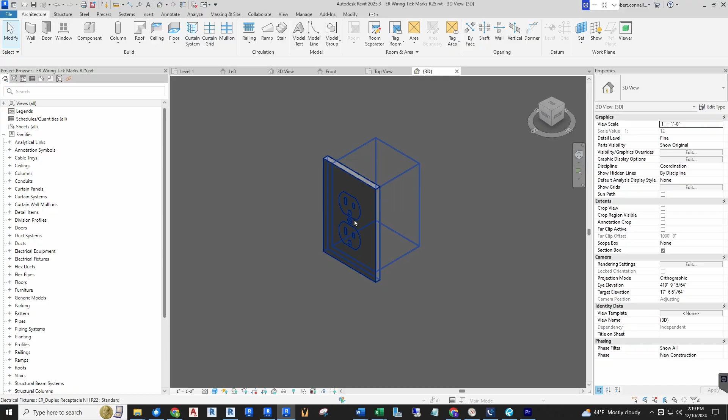So what if I told you that in Revit, you could have an electrical box with a cover that at the click of a button can be recessed or surface mount? Well, that's what we're going to cover in this video, so stick around. Let's get right into it.

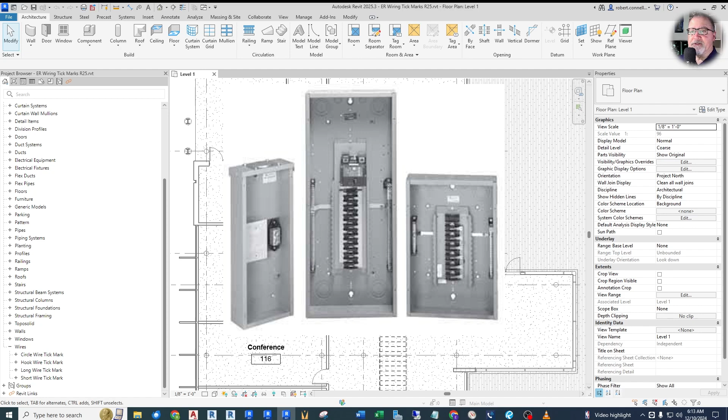So if you've done much electrical design or even installation, you know that electrical is full of boxes. We have device boxes, back boxes, pull boxes, junction boxes, panels are boxes, switchboards, everything's a box, really. So in Revit, it is handy to have just a box family that can be converted into these other kinds of devices and boxes. And one nice thing to have also is a family that can be recess mounted, like out of the box type of devices, but at a click of a button would be nice to have it surface mounted.

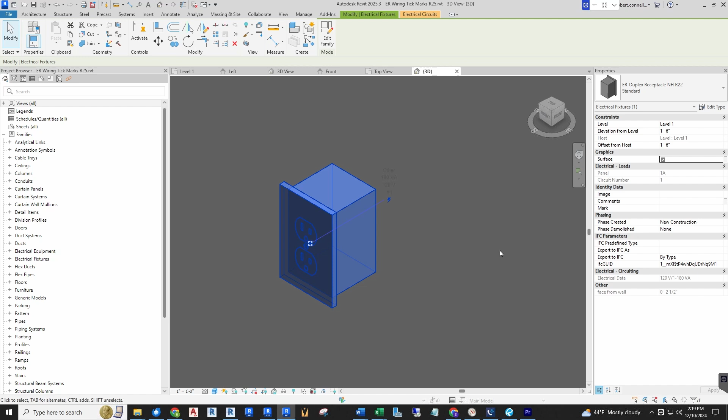I'm working with a client that does a lot of light industrial manufacturing kind of work, and they use a lot of surface boxes. Now, in a plan view, it's not quite as important how it looks. It'll just look like a symbol, like these receptacles down here. It's just the same symbol, whether it's recessed or not. But in 3 dimensions, if you're trying to do some coordination or even present some kind of a 3D view on your drawings, it's nice to have that box actually be surface mounted on the wall.

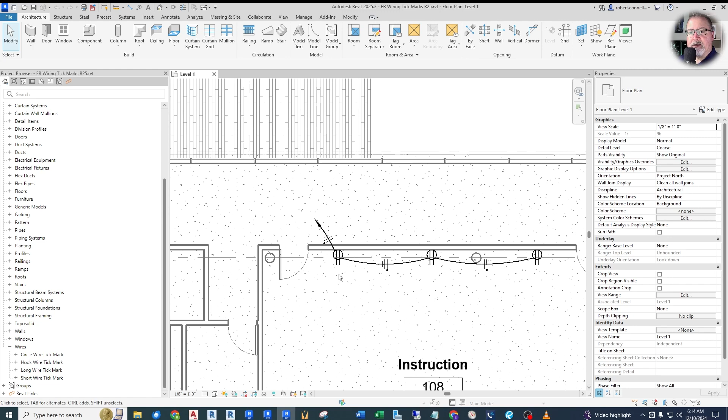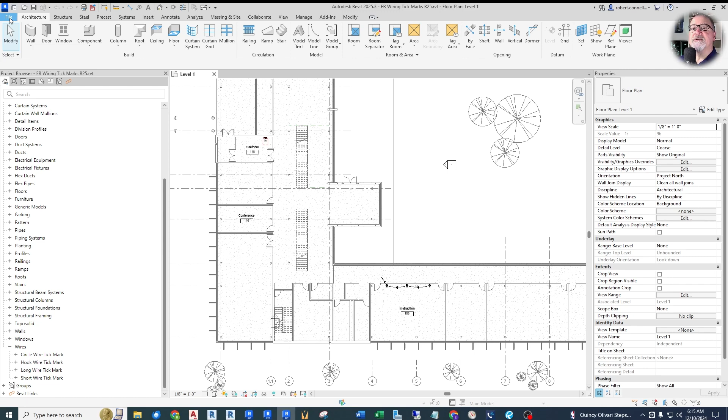So that's what we're going to do today. We're going to show you how to build this universal box as a custom family. It's a fairly good starter project. It has some complexity because of the toggle between surface and recessed, but as we get into it, I think you'll understand how it works. So what we want to do is actually start a new family. So go to File, go to New, and go to Family.

And when you go to create a family, you have to start with a family template. Revit comes with many different kinds of family templates, as you can see here. Things as specific as electrical equipment, ceiling or wall based. There's a lot of hosted. That's what wall based is, a hosted family that has to connect to a wall or a ceiling. Fire alarm, we have mechanical, all these different things.

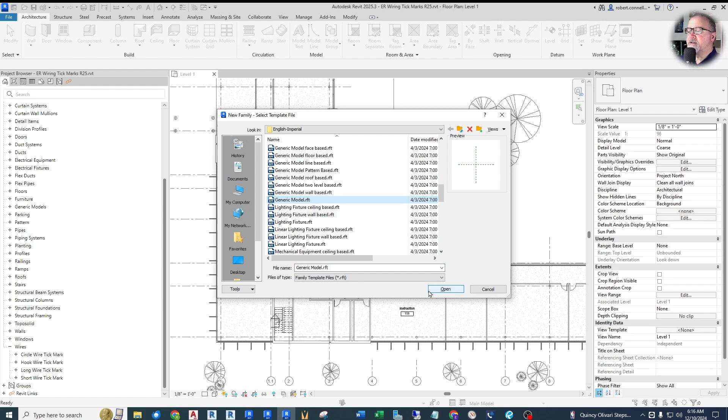Well, what I want to start off with is a generic non-hosted family that I can put anywhere in my plan. So I'm going to start with generic model. I don't want wall based or any kind of based. Based means hosted. We want generic model. So let's just open this up. And it puts us into the family editor.

You have your views on the left, kind of like a project. And then you also have a properties box, which I put on the right. It can be anywhere. And you have your ribbon that you can create different shapes and create lines. You can add connectors to these families because, as we know, MEP is all about the connectors. And then things like reference lines and planes and things like that. So what we're going to do is get started on this box.

It's going to be a generic box, so it doesn't have a category. Now, remember, in Revit, the families are classified by their category. You have electrical fixtures, you have electrical equipment, you have lighting fixtures. And so there's different categories. You have data devices, fire alarm devices. We're going to create this as a generic box, so it does not have a category yet.

This is going to be the basis that we use for other boxes. Once you have this box created, you can use it to build panels, pull boxes, all these different boxes we talked about. You can use this model to create that. So this is just a generic box with a cover. This view we're at right now is called the reference level. It is a top view.

As if you think of like a plan view, we're looking down at the top of our device, and our device is going to sit right here where these lines cross. You can click on this, hit F2 to rename it, and I'm going to say top view. And then this 3D view, I actually want to call this 3D view.

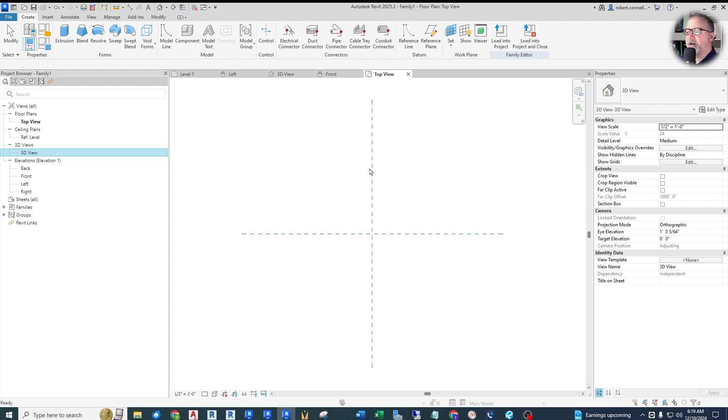So since this is a top view, this here will be the vertical center line of our box. I'll do it with lines here just to show you. We're going to have the back of our box like this, and then the faceplate will be out here.

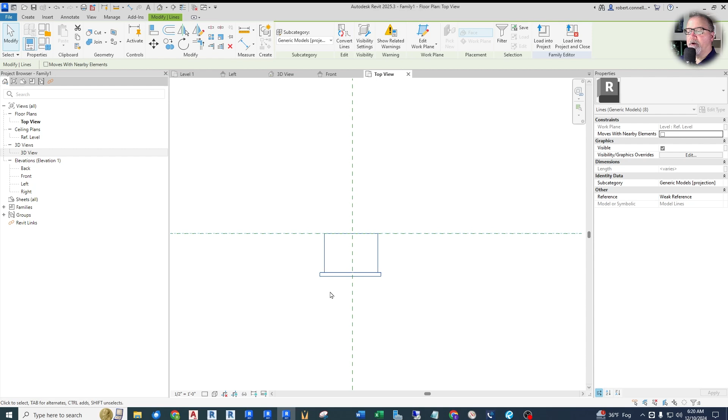And this will be the wall surface for a recessed box. Now, for a surface box, I want all of this stuff to move out to here so that this wall line is at the back of my box. So we're going to put some parameters and some dimensions and mechanics into this thing to let this pop back and forward. So that's an example of what we're going to do.

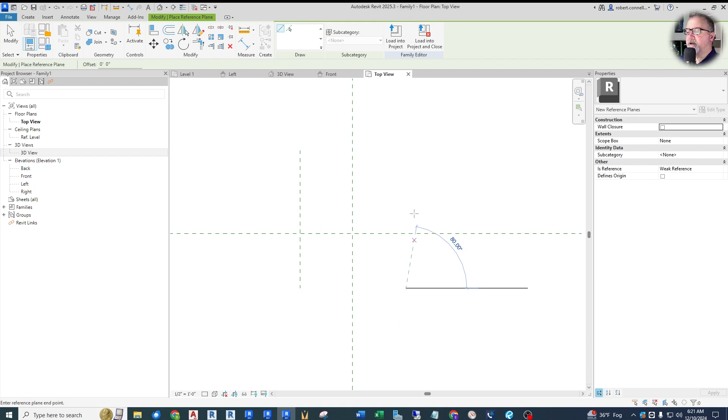Now, to do this, we want to draw some construction lines. We're going to be using a reference plane. So a plane is like a sheet of paper. It actually goes on to infinity. So we're going to draw a flat plane, and we're going to make the boundaries of this back box that I drew in. So we need a left side and a right side, and we want those to be parallel. And then we want the back of the box. And I can just say create similar and draw the back of a box.

These are just kind of my sketch lines. We want a face of the box. Typically when these families are created, the face of the box is this line right there that is the wall. It's always at the face. But we don't want it always at the wall. We want the face of our box to be adjustable. So we need another separate line that is the face of our box and where our cover plate will go. So again, let's create a face of the box. Now I'm going to draw it a little bit forward of this line.

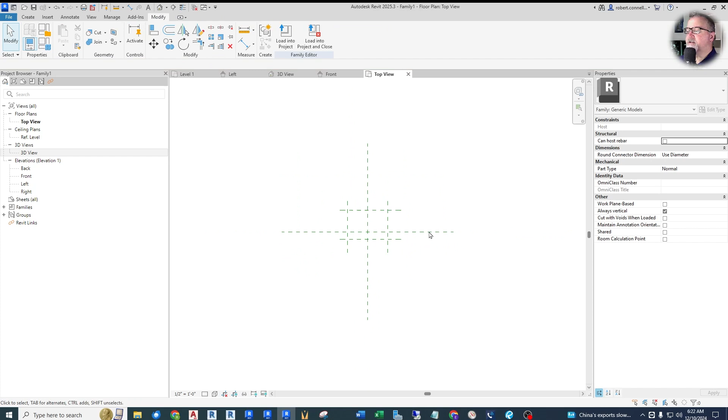Now this line here, I can't select it because it's pinned. Let me undo that. This is called the center, front and back. Again, back of the box up here, front's down here. This is the center. We're going to treat that as the wall. So here's the front of our box. So we're going to get this drawn in and as an extrusion.

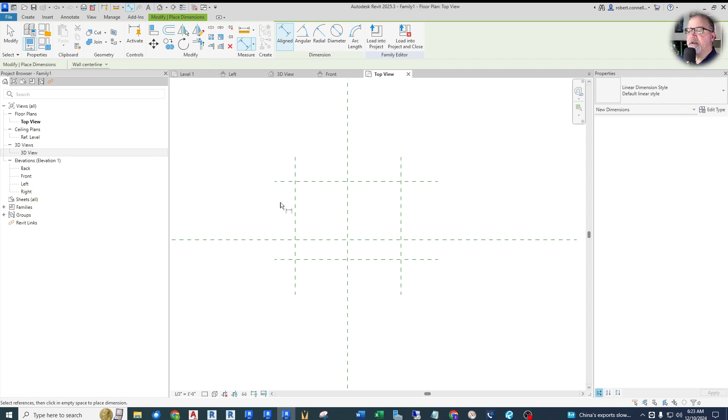Now I want to put some measurements on this. So I'm going to use this standard. This is a dimension. It's an aligned dimension. As you can see here, we can do angles and radial diameters, things like that. Aligned dimension. And I'm going to go from what I'm considering the front of the box to the back of the box. Now, just as a side note, you can actually click on these and name or label these lines. So let's go ahead and just name this one, just as an example. We'll call this front of box.

There. Now, this dimension right now is set. I can change it by moving these around. You can see that dimension changes. Or I can give this dimension a label so that I can create a parameter for this. I want to create this box so that I can change its dimensions to make any kind of box I want. So up here under label dimension, I'm going to label this dimension. And right now there's none to choose from. So I'm going to create a parameter for this label. And let's call this parameter box depth.

Now type or instance. This is where you get into a big decision on parameters, whether they want to be built into the type of that family when you bring it into a model, or do I want to be able to change each instance, each location of that box? I want to be able to make it variable. For the purposes of this universal type of box, I'm going to set these up as instance. Now I can change this later as I create actual device boxes or pull boxes or things like that.

I already know that it's a length type of data. Now I can group it under a name. So leaving it as dimension makes sense. So that's good there. So, okay. There it is, box depth. Now I can change this box depth. I can change it here, or I can go up to the blue little symbol, family types. Now this is where you see the list of all your parameters. And under dimensions, which we chose, here's that box depth.

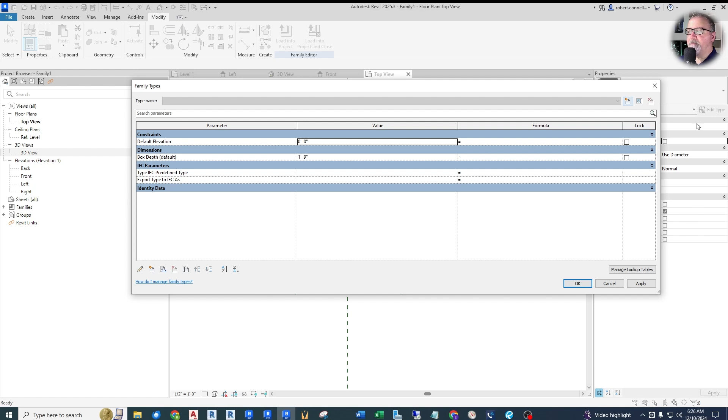Now we also want a box width, so we'll do the same thing. We'll put a dimension either here or go up to here to the quick access dimension from here to here. We're going to click on that, give it a new parameter name, box width, leave it as instance under dimensions.

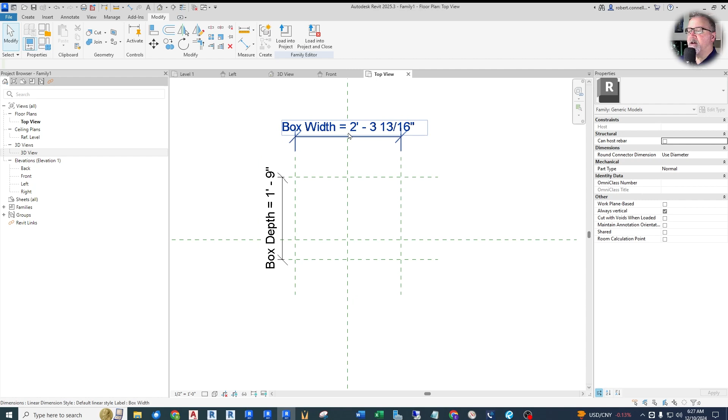We're good, simple. Now, one thing about this is I want this box to be kind of centered on this line. So right now I can move these dimensions around and it's not centered.

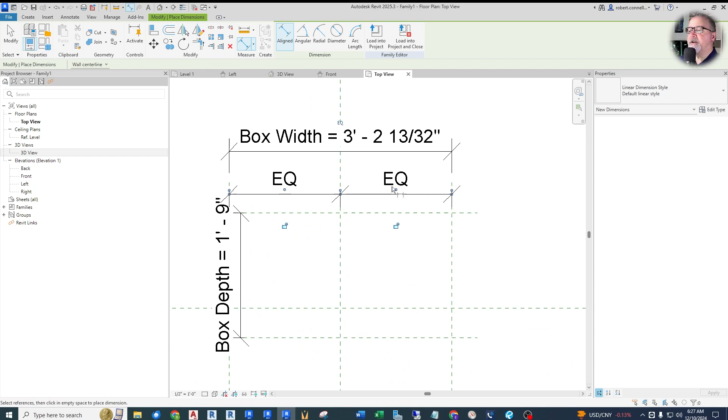So the way to make this centered is to use another dimension up here. This time we're going to dimension from the edge to the center line to the other edge. Click anywhere. Now, up here you can see this little EQ with a slash. We click on that and it makes these dimensions I just created equal, which in effect centers this box.

So now if I move these dimensions, both of them move and it keeps it centered. Now we can actually draw an extrusion of this box, so we want it to turn into a 3D box. Well, how do we do that?

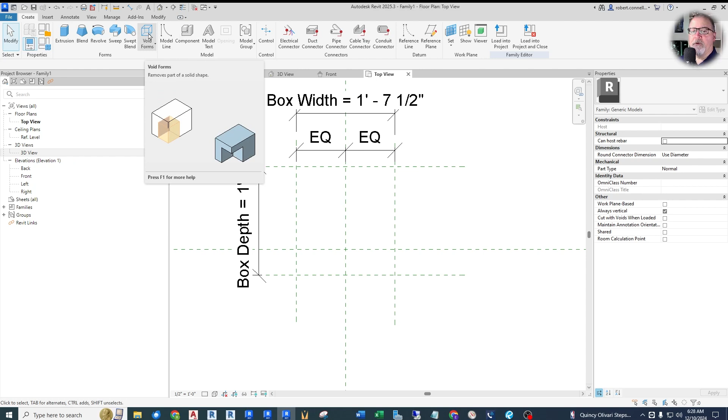Let's go over to create. And here's where we have our forms: extrusions, blends, revolves, different types, different shapes. There's even a thing called void forms where you can actually cut out a piece of your box. So let's just go to extrusions, and it puts us in kind of a sketch mode. Things kind of dim out and we get the check and the X up here.

Here I'm in Revit 2025 and they put the depth up here. It used to be down here, but you can make the depth of the extrusion because I'm working in 2 dimensions, working on the width and the height maybe of a rectangle. There's also a depth, a Z component into or out of the screen, so I can set that. Well, I'm not worried about that depth right now because I'm going to force that depth to be a certain depth with another reference plane, as you'll see when we get to the front view.

So we have our tools, drawing tools. We can use lines or rectangles, circles. You can even use pick lines, where you pick lines to be the edge and then have to trim them. I'm going to use the rectangle because I'm just drawing a simple rectangle.

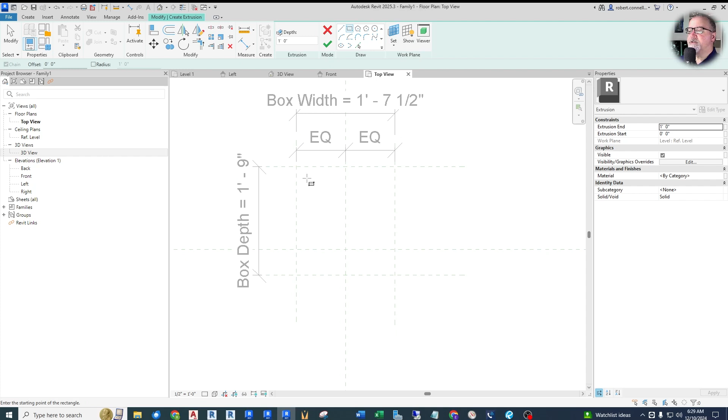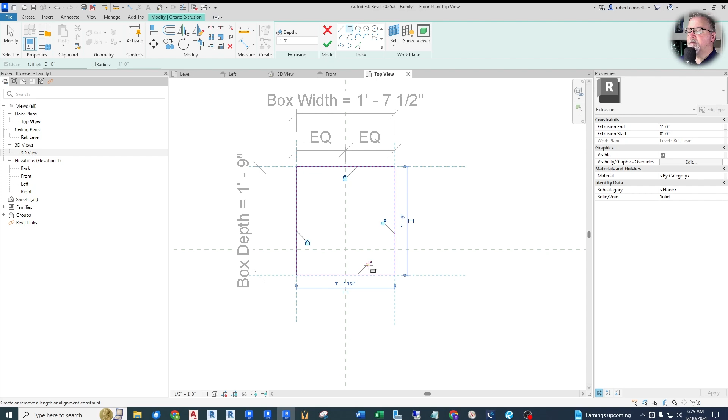This is a box. Now I want to go clear down to the face of my box. Now I can make these hit exactly, snap to these reference planes. And when I do that, it gives me the option now of locking my sketch to that skeleton of reference planes, so I will go ahead and lock that. That's very important. And then I'm done.

Locking it allows this extrusion to move with these planes. These planes are what guides this extrusion. We don't dimension the extrusion itself, we dimension its reference planes.

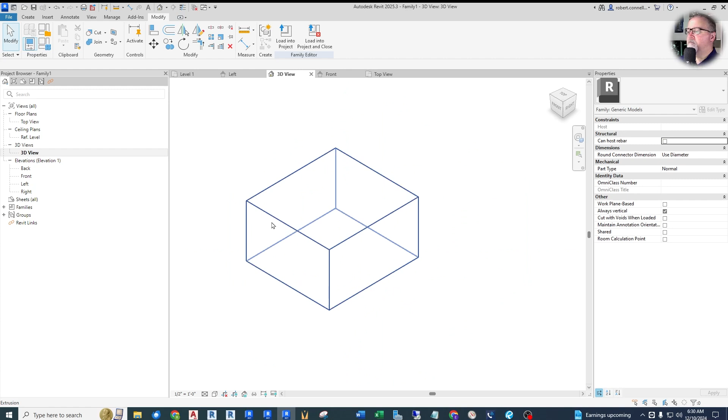So let's take a look at this in 3D. What do we have? There we go. We made a box, I hope you're proud. So there's our box, and we can make it look a little different. We can get it shaded so it's nice and gray with a shadow, but that's essentially what we made is a box.

Now let's look at the front view. It's already here. The front view, we will see a datum point called a reference level. In this case, this reference level would be the elevation above the floor. What do we want that height to be? Do we want that height to be to the bottom of the box, top of the box, center of the box? Well, this has implications to what kind of box it ends up being.

Let's say, for example, it ends up being a panel board. A lot of panel boards, I like to have the dimension, vertical dimension, to the top of the panel. For a receptacle or a data outlet, I like it to be to the center.

Let's say you have a box behind a wall-mounted light fixture, a sconce or something, and maybe you want that to be at the bottom of the fixture. This has implications depending on what kind of box you make, so in reality you may need to create 2 or 3 different universal boxes for whatever you're making. For this one, we're going to call it a box for a device.

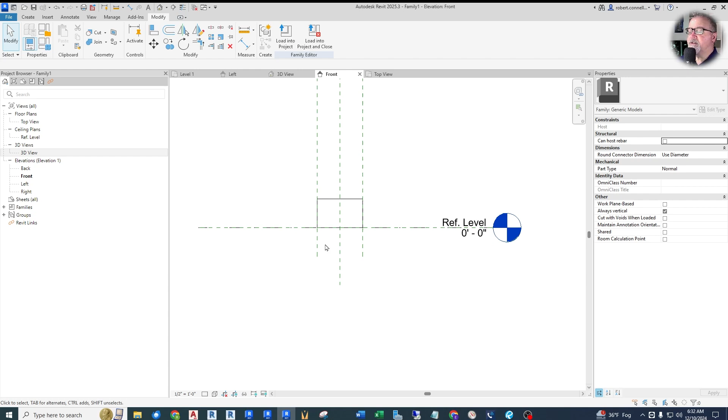We'll go to the center. So we need a bottom of box and a top of box reference plane. Go back to create, reference plane, and we're going to do a bottom of box and a top of box.

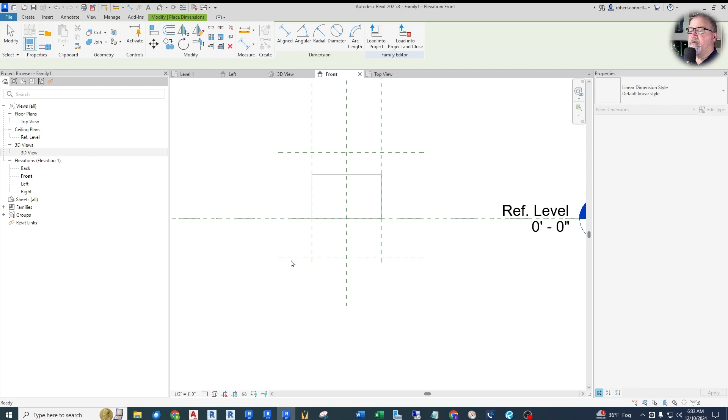Again, we're looking at the front, the face of our box, and we need some dimension. We're going to go from the bottom to the top, click anywhere, and we're going to call this box height. The rest of these are good, like before. Now that shows up in dimensions here, and we can see there's no default on height or width.

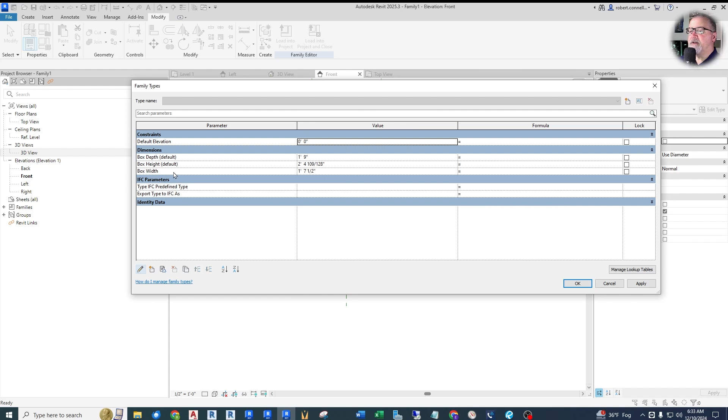So I failed to change these two instances, but that's easily remedied. If you do it wrong, you can just edit it. Click on box height, go down to the pencil here to edit, and simply change it to instance. There it is. Same with width. So even though you create these once and do it wrong, you can change that.

Now we also want this box to be centered on this reference level. We don't want the actual level itself - there's actually, if you tab, you can see there's a reference plane behind it. That's what we want to dimension to. This reference level is kind of in my way.

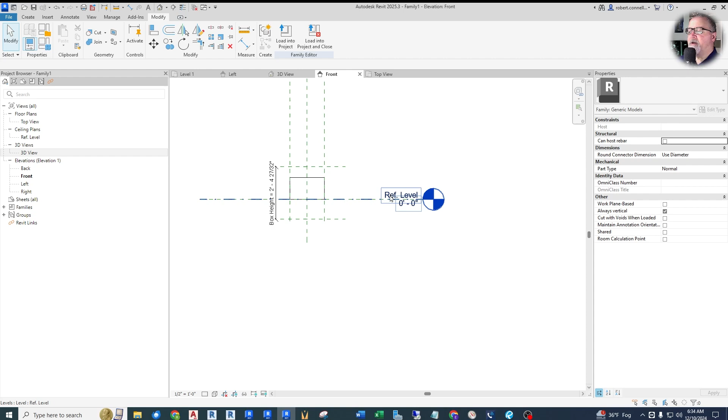So what I can do is move it, simply move it out of the way. There - now it's still there, it goes on to infinity logically. But now I can get to this reference plane, which is what I really want to be dimensioning to.

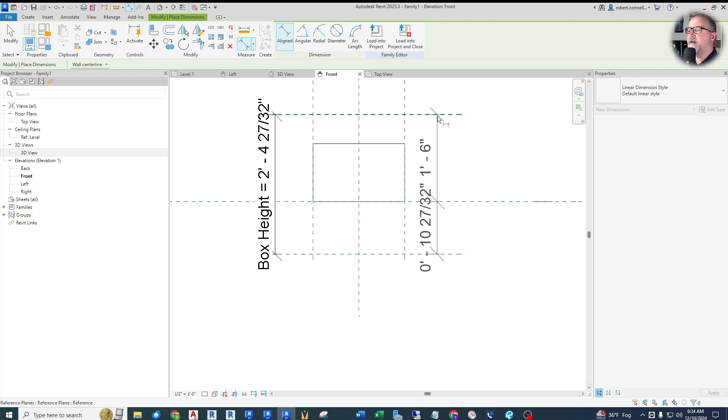I want to equalize this, I want to center it. So let's go back to our dimensions, and we take our 3 - I can do it over this side, get the 3 of them, hit the equal. There it is.

We get this error: constraints are not satisfied. You'll run into these as you're doing family editing because there's a lot of particulars with how constraints work. They mean things like locked items, things attached to dimensions. So what constraints - we have this, it kind of yellows out or oranges out this center one. What's happening is this center line is actually pinned or locked, and so it's trying to move it to make it equal.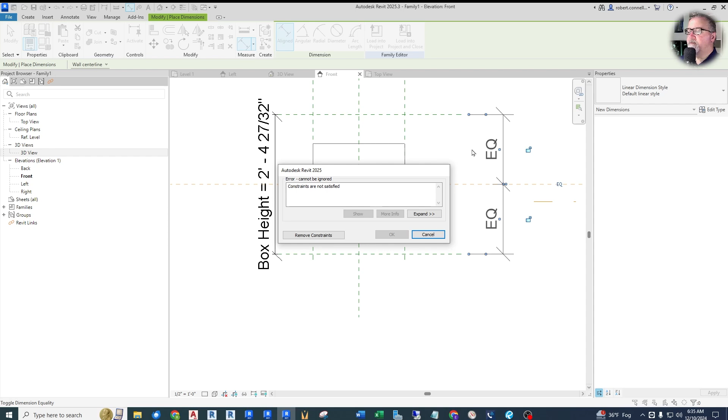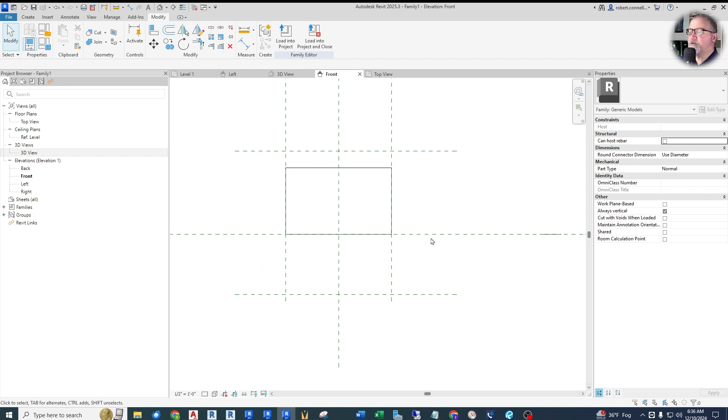So let's cancel that. What I need to do in this case is equalize this before I give it a box height. So let's get rid of this. I'm going to make sure these are equal first before I apply my equals to it, so it doesn't try to move this pin. Now I don't want to unpin it because I still want this center line to be at this reference level, but I do need to make sure these are equal before I apply my dimensions.

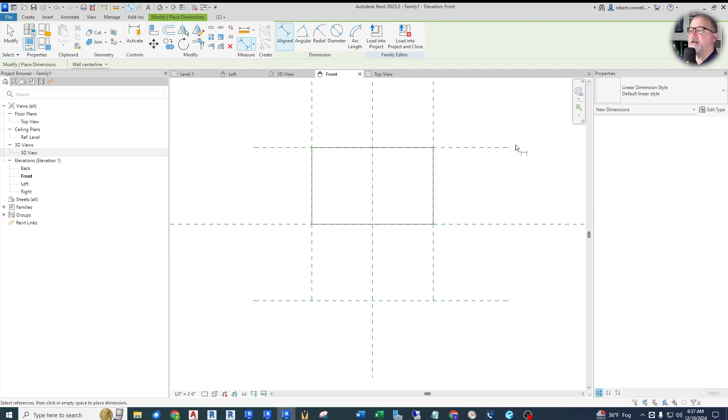What you can do is click on that, and then get to this dimension itself and just type in 1 for 1 foot. I can get to this one and type in 1 for 1 foot. Now these are equal, so when I do it, it shouldn't give me an error because they are equal - there. So now I can apply my dimensions for the height.

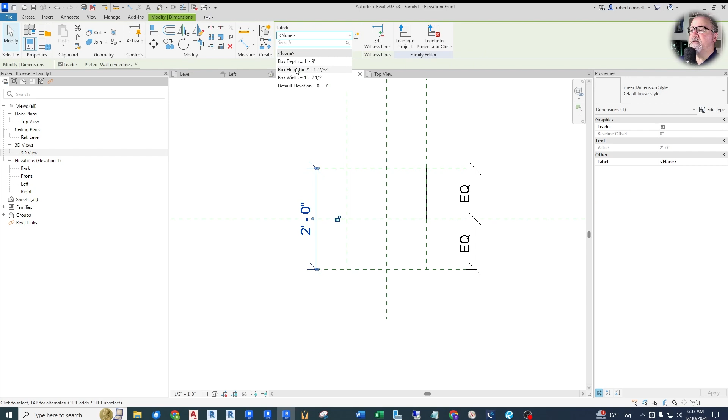Now you may think, oh, I have to recreate this parameter - well, I don't, because it's already made. Instead of creating a new one, I can just go to the drop down and find it, box height, right there. So now I want to tie this extrusion to these dimensions so that my box height is controlled by them.

The way I can do that - I don't have to go back into sketch mode. I can do it directly from the extrusion. So click on the extrusion. I want to align the top of this extrusion to this reference plane, so what I use is the Align tool.

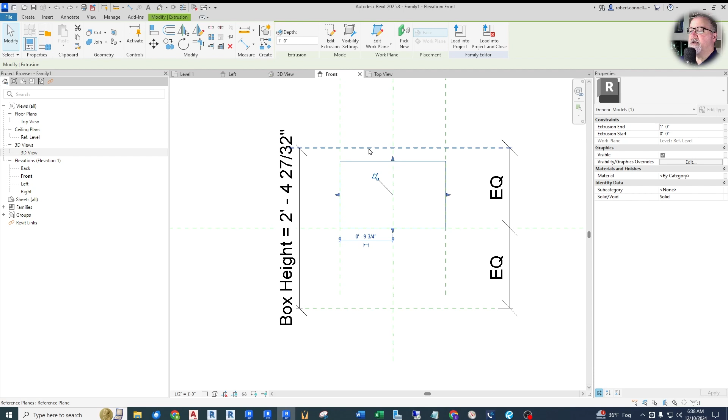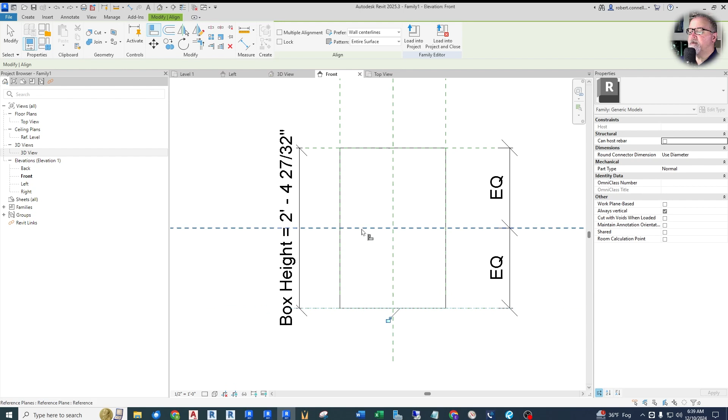Up here under Modify is called Align, AL is the shortcut. I want to align it, go to there, from there, and lock it. I still have the Align tool. I want to go to here, from, and make sure I'm touching the extrusion. It'll tell you extrusion, and lock it. Now my extrusion is attached to these reference planes, and as I change the dimension, it changes, as you can see.

It's good to test your family frequently. Pretty much after every dimension, I like to test it. It's called flexing your family. You flex it, bend it, to make sure that it's working. Otherwise, you'll end up toward the end and it's broken, and you won't know which step broke it because you're too far into it.

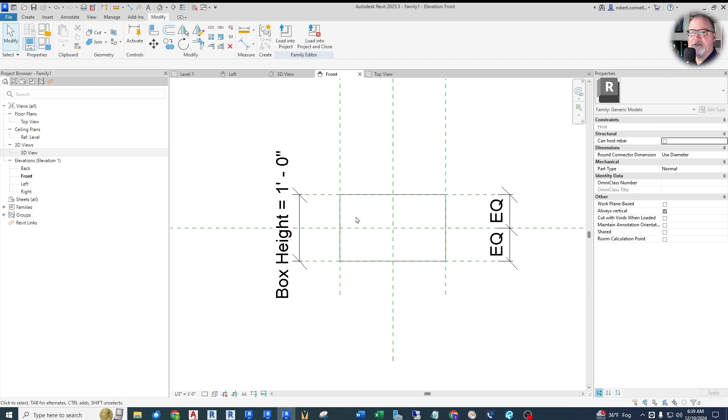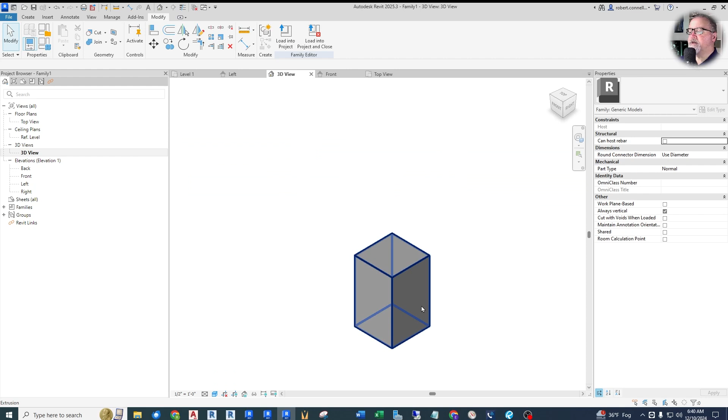Let's go back to our top view. So here's our box, and it got moved away from here because it floats. This box is not tied to this wall line yet. So let's go ahead and get this thing down closer to where we want it.

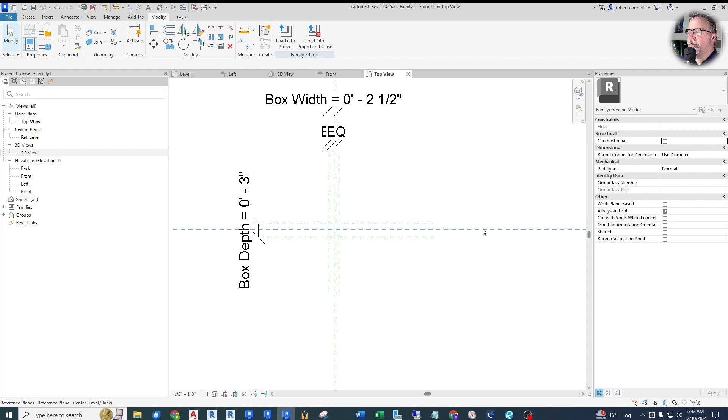Now what I'd like to do is get this box tied to this line that's going to become the wall line. The way I'm going to do that is control the dimension between the face of the box and the wall. When it's recessed, I want this dimension between the two to be 0. And when it's surface mount, I want the dimension between the wall and this line to be the box depth. See how that works?

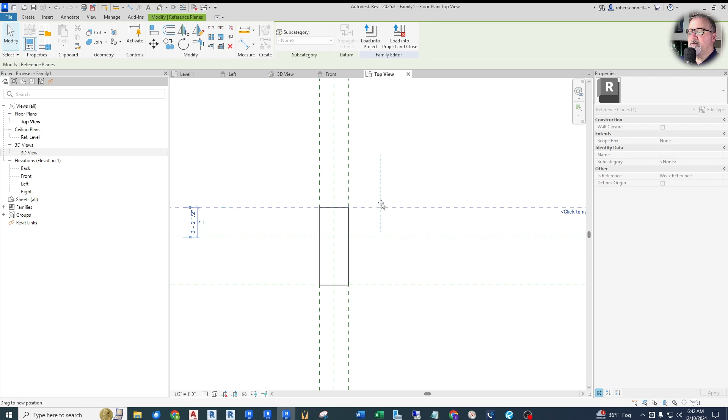So I just need to create some parameters in here that do that. Let's get a dimension between the face of the box and the wall, from here to here. And I'm going to name it just that - let's name it face to wall.

I'm doing this lowercase because I don't want this parameter to really be adjustable by the user. This is kind of in the background, it's like a working parameter. So I'm making it kind of nondescript, making it blend in. The way I can make it blend in is get it out of the dimension heading. I'm going to put it down in a place called Other. I'll show you where that ends up.

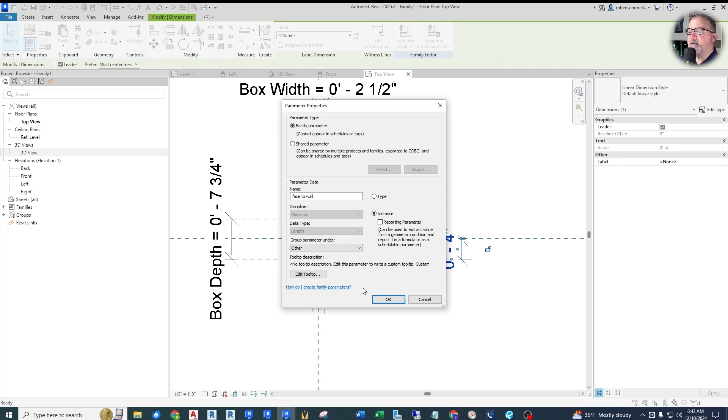So Other, again we need instance. Look at the parameters now - you look at dimensions, you don't see it. It's way down here under Other. And when this family is in a project, in a model, there'll be other parameters in the way. This is going to be way down at the bottom - people are not even going to see this. We're also going to put a formula in here so that people cannot change this. I'll show you how that works.

So that's the first step. We have this dimension - how can we make this dimension variable? Well, we're going to give the user a button to push to change it from recessed to surface. I want the default to be recessed, like you see out of the box when you get a receptacle. And I want to give them a button. Now how can I make a button or a switch?

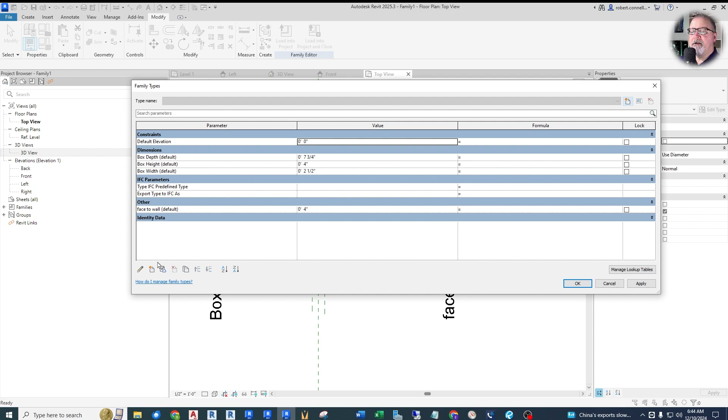Well, the way you do that is to create a parameter that's called a yes/no parameter. Now I don't need to tie it to a dimension - I just want to create a parameter from scratch. So in my family types, down here at the bottom, I can say new parameter, and create a parameter from here. New parameter, same box - I'm going to call this 'surface,' which means if you click the box named surface, it turns it into a surface mount box.

It's also instance. Now, discipline common is fine. The data type - this is where I can pick what I want. The dimensions were lengths, but you could have integers, angles, any kinds of data type. We want it to be a yes or no. And I do want this group somewhere where I can easily get to it - I don't want it down here in the bottom Other.

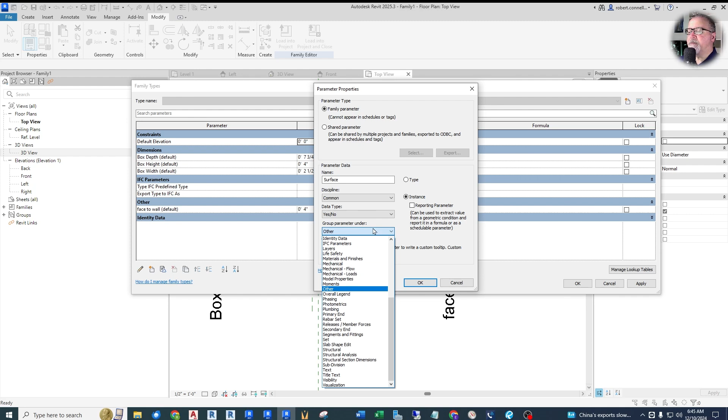Do I want it under dimensions? Possibly. Another place I like to put it is called graphics. That ends up kind of up top, here. So graphics ends up here, it's kind of easy to find for the user. It says surface, it's checked right now, but I can check it or uncheck it. I'm going to make the default unchecked, which means it would be recessed.

Now follow along with me. This is where it gets a little complex as a starter family. We are going to use a formula and some Boolean logic. So what we're doing is we want to create an if statement. If you've done any coding, you know how those work. An if statement to say: if the user selects surface, then I want this face-to-wall dimension to be the box depth. Remember we talked about that? We want to pull it out, box depth away from the wall. If it's not selected, we want that face-to-wall distance to be 0. Those are our two conditions.

So the way you do that in Revit: if, and then put in parentheses. What am I testing? I'm testing the variable called surface, so I just type it in. If surface, that just means if surface is selected - surface equals 1, if surface is asserted, whatever you want to call it, surface is selected. If surface, it implies if yes, comma, what do I want to happen? The first thing I want is face-to-wall to be box depth. So again I just type that in, box... you don't get to select or choose it, you just have to type it in exactly the way the parameter is set up, box depth. Another comma, if not - so if then, and if not, or else, we're going to say it's 0. Simple. So the face-to-wall distance, if surface is checked, it's going to be the box depth. If it's not checked, it's just going to be 0. Close parentheses, apply it. If I didn't make any typos or spelling errors, it should be fine.

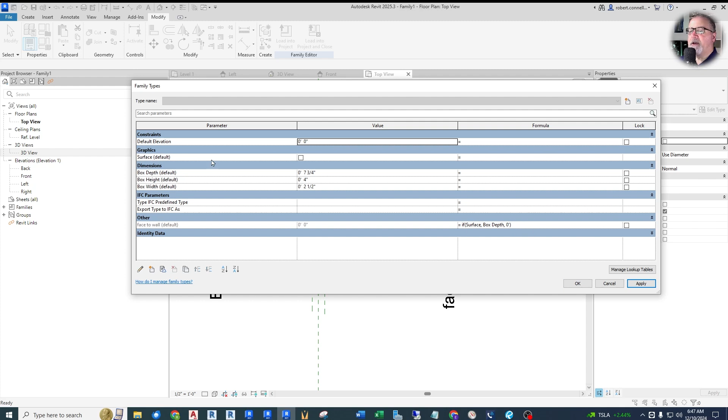Looks like we're good. Say okay, I have it unchecked - the face to wall is 0 because surface is unchecked. Now if I go to surface, I'm going to make this box a little smaller so we can see what's going on. Now if I click surface and say apply, bam, the box jumped out to the face of the wall. So simple - that checkbox moves it to surface and recessed.

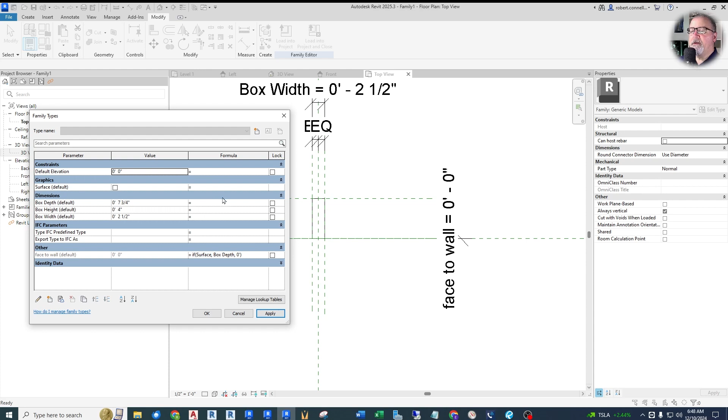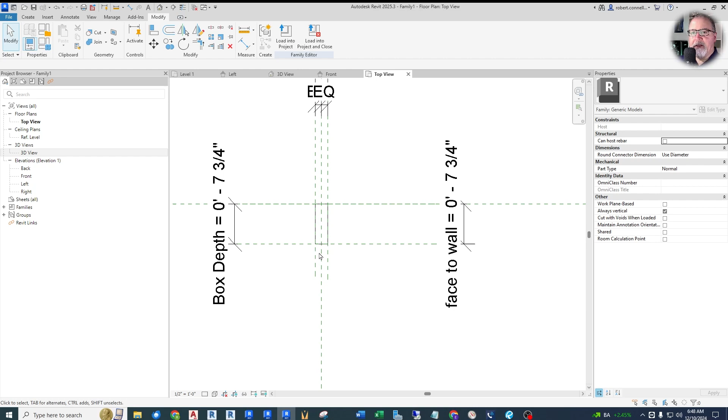Now I'm going to go ahead and keep it on surface to do the rest of the family. I would like to add a cover plate to this box. Most of the boxes you use will have some kind of cover plate. Now that varies too - in real life a recessed box cover plate extends beyond the box, while on a surface cover plate that may be the same size as the box. So we can get crazy and apply some more dimensions for this cover plate width, overlap, and all that. For the purposes of this family, I'm not going to do that. I'm just going to let it overhang for either case.

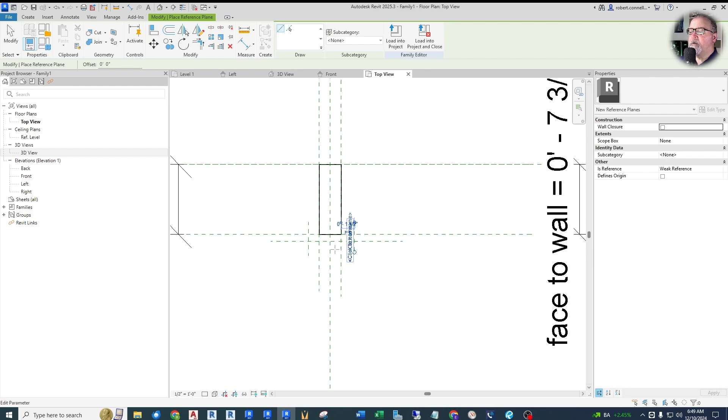So what we're going to do is create another extrusion. This is the cover plate. I need to create some more reference planes. So this will be the face of the cover plate, and then I also have sides to the cover plate where it extends over. I'm going to make the parameters be the extension so that if you want to get crazy and include some more adjustability features for this cover plate, we can. So let's do that - dimension from here to here, and we're going to call that...

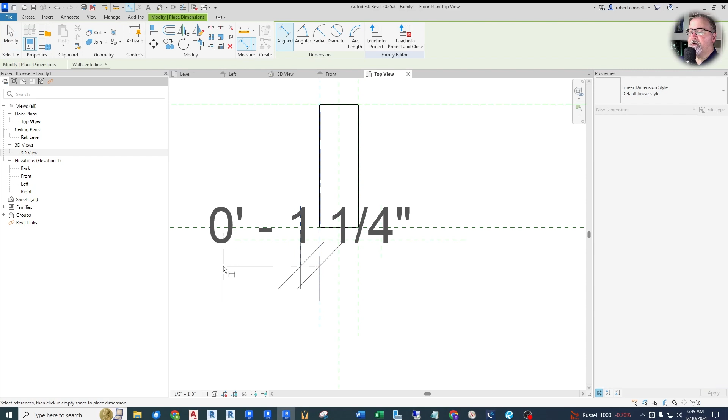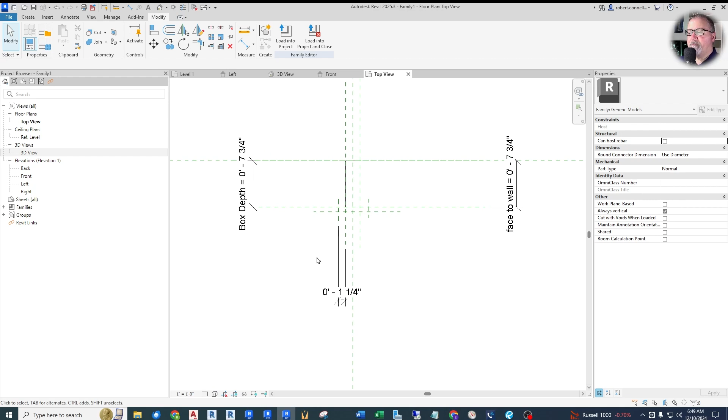Now if these dimensions get in the way, you can move them out of the way down here. You can also make them smaller just by changing the scale of the family. Now this doesn't change anything, no dimensions get changed, it's just a graphical representation - it just allows these dimensions to be smaller on the page. So we're going to make this dimension be something like cover overhang - that's how far the cover extends beyond the sides of the box. Again, we'll make these all instance parameters. It's a dimension.

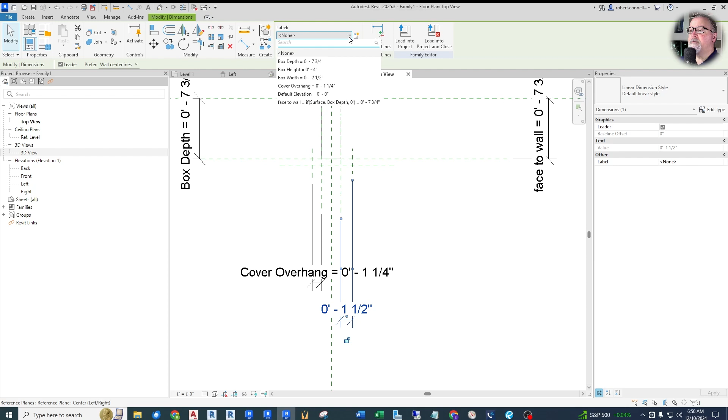So cover overhang. Now I want the other side to be the same thing. Now I can't do an equals because I've got a gap between them, but I can just set it to the same parameter. So this guy here, when I go to set this dimension to a parameter, I can choose a parameter I already have, which is cover overhang. And that way they're both the same. You can use these parameters over and over. I'm also going to use that for the top and bottom overhang when I do the face view.

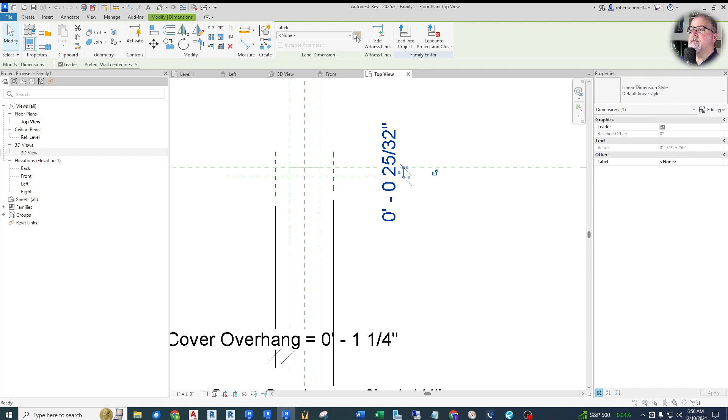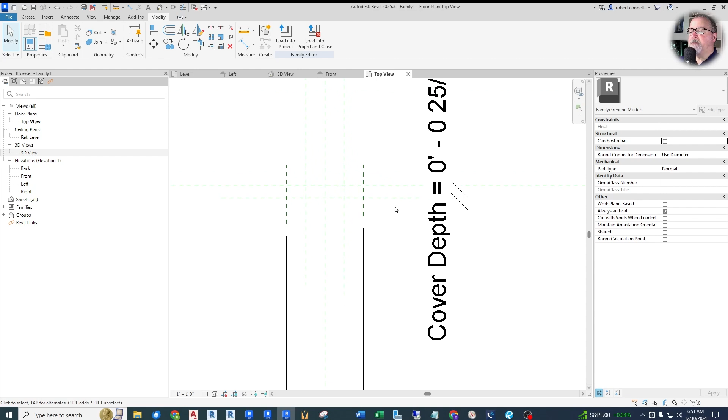One more thing I want to do in this top view is the depth of the cover. So here, from the face of the box to the face of the cover, and I'm going to call this cover depth, thickness, whatever you want to call it, or depth. So all these parameters are going to be available to the end user. So now we can create this extrusion, and then we'll go and do the front like we did the other. So we just need another extrusion, which is going to be this box here to be the cover plate. Create, extrusion,

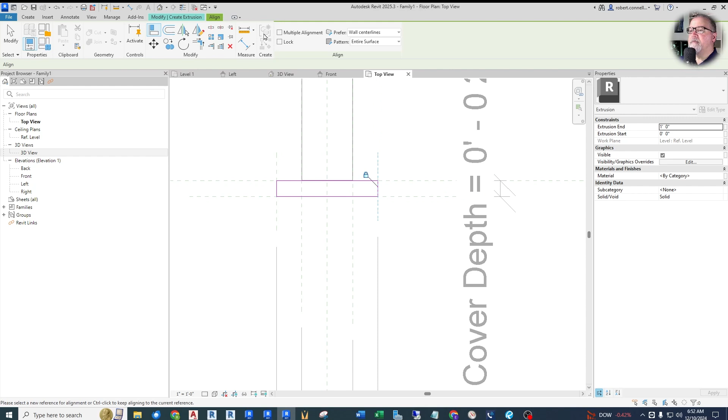rectangle. Now this time I'm going to draw it a little bit over and show you how you can align these. I'm still in sketch mode. It's purple or pink, and I still have these here. I can align this now. So align there, lock it, align to here, from here, lock it, to here, from here, lock it, and to here, from here, lock. We're all locked. Now it kicked me out of my sketch mode because I'm in the align mode. So I need to go back here. There we go. And finish that. Now my cover plate extrusion is aligned to its dimensions.

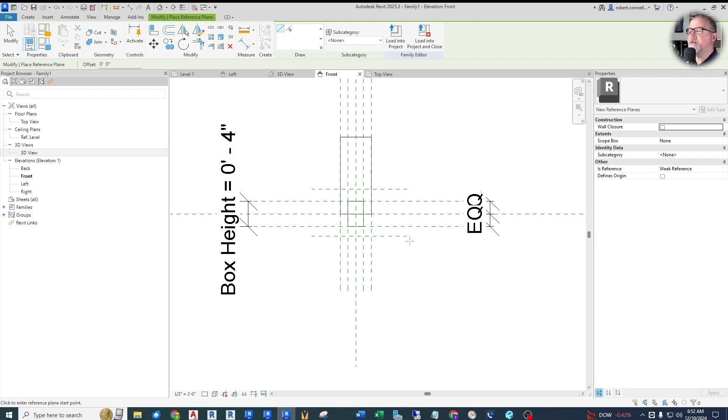Let's take a look at the front. Cover plate's huge because we don't have dimensions on the height yet. Let's go ahead and create similar, and let's get some height and some lower dimensions to this cover plate. I want the overhang to be the same. So here we go. Just putting these dimensions. Click on it, choose the overhang that I already have. Overlap, give it whatever descriptive word you like. Here to here. That's the bottom of the box. Overhang. There we go. Now I need to attach this extrusion to those dimensions.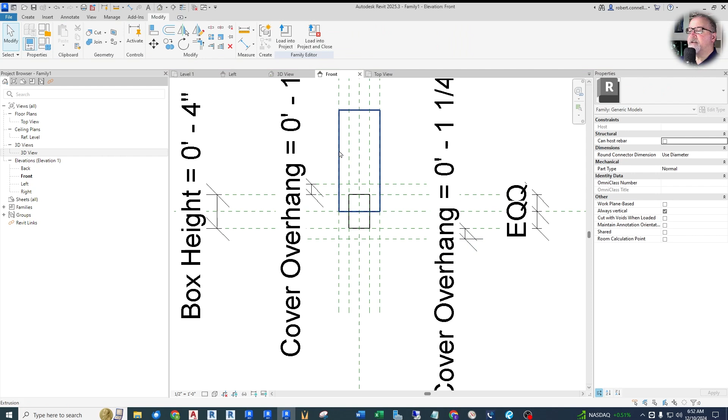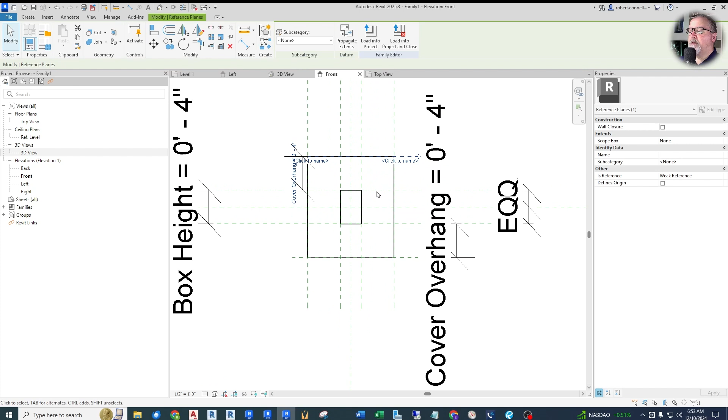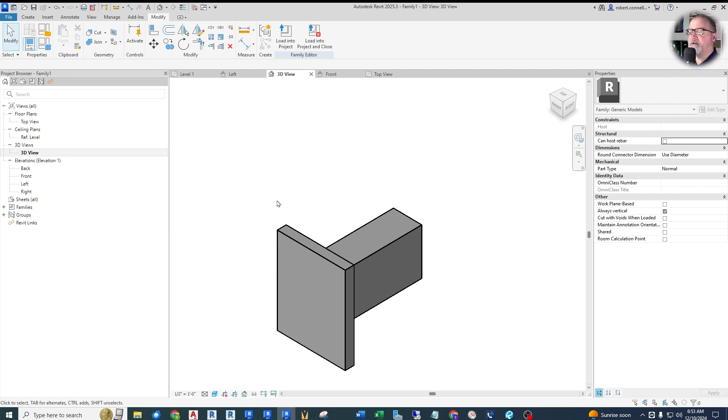So let's do this bottom guy first. Let's align to here from this one and lock it. And the top of my cover plate, I want to go to here, from here. Now, you can see my cover plate expands nicely in all directions. Things are flexed. I have things set up as instance parameters. We're good there. So in 3D, this is how it looks. Now that's ridiculous because the dimensions aren't right, but you can see how that works. And again, I have my surface, apply it, pop it back for recessed. There we go.

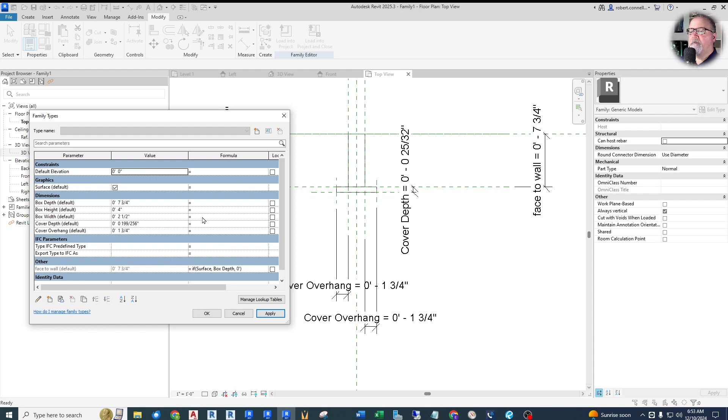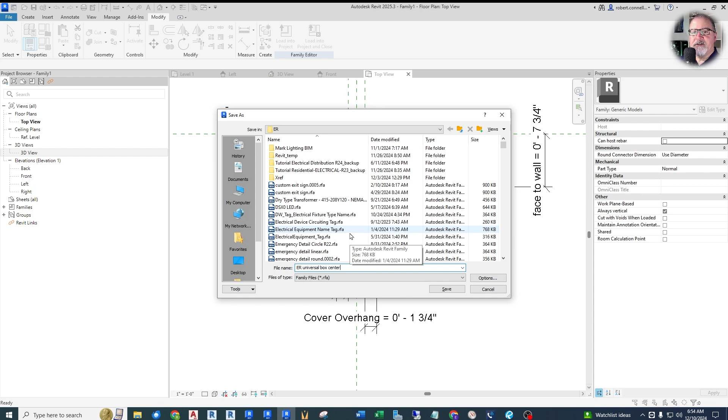Now, I'll save this as my generic box. So I'm going to file, save as, and it's a family. I'm going to save it as, and I like to put my descriptive initials there first. I'm going to call it universal box. Now, because of that dimensioning for the height, it could be the bottom of the box, center of the box, top. I'm going to call this center. It'll remind me that this box is set up for the center as being the mounting height. I'll have another box called bottom or top. Save it. Now this box is ready to be turned into other things.

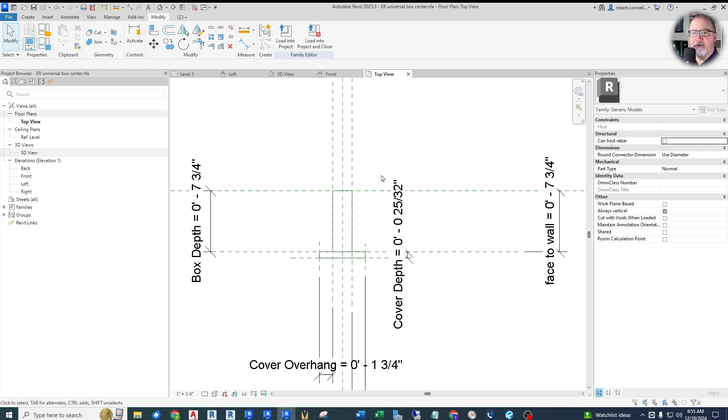I'll want to add a symbol to this. I have other videos that show you how to add a receptacle symbol to this family so that the symbol shows up the same size in every scale. You may want to add some graphics, some lines to the face of this cover plate to look like a receptacle or a data jack, fire alarm pull station, whatever you want it to look like. This is now the basis for many, many other families that you will not have to recreate this box every time.